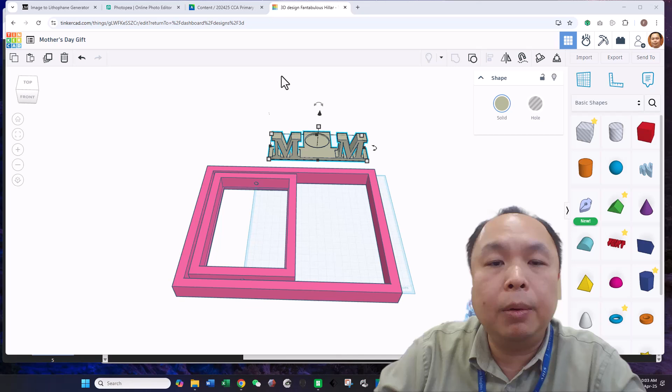Okay, this is one of the easier designs. You just create two M's and then we use lithophane. Later we will use another software. We may use up to three software to create this for this lesson. Okay, if you want to create this, let's look at my design here.

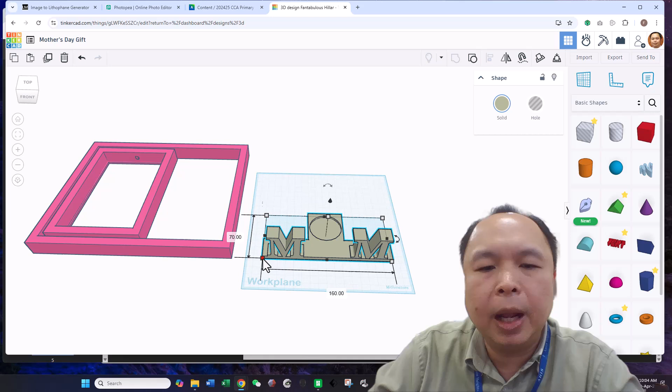You can see the size is 160. This is the width. Then this is the length, 70 times 160. The height you can choose about 38 to 40. That is fine. And then you need to create the love shape using the lithophane software.

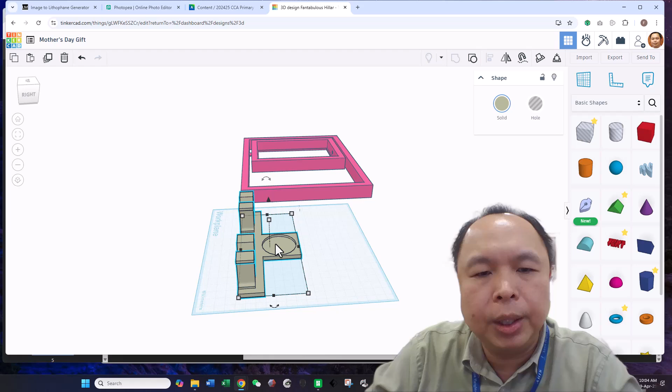What is this behind? Behind is actually a place to put the candlelight. We will use electronic candlelight, so it will be safe. We don't use real candlelight; it may cause fire if we are not careful. Okay, so this is the foundation you create, and then to create this one, you use a software called Lithophane Maker. Go to this website and you can create this.

So you need to bring along a photo. What you can do is upload your photo in your submission, so on the next lesson you can download it back. That is how you can upload from your house and keep the photo in Blackboard. After that, you download it back when you are in school during your 3D modeling club session.

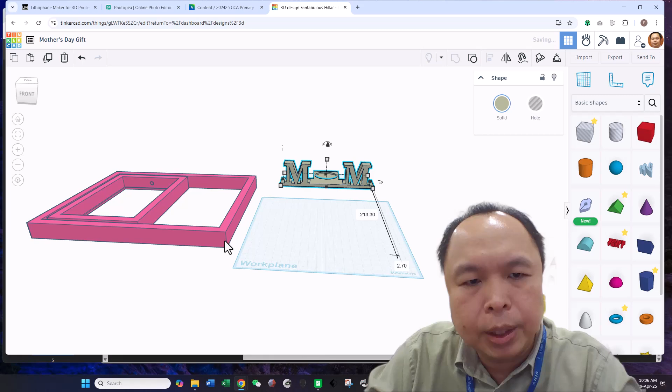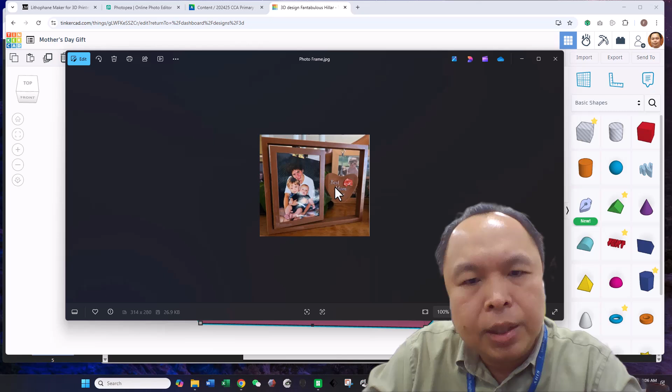The second one we will do, I prefer this one, frankly speaking. This is a lot nicer. If you look at this other design, this is the design I want you to do. Very nice. We can print in different colors; we don't have to print in this color. You can create a message for your mom, and then we can hook it to the frame. You just need to make sure you have a hole at this area.

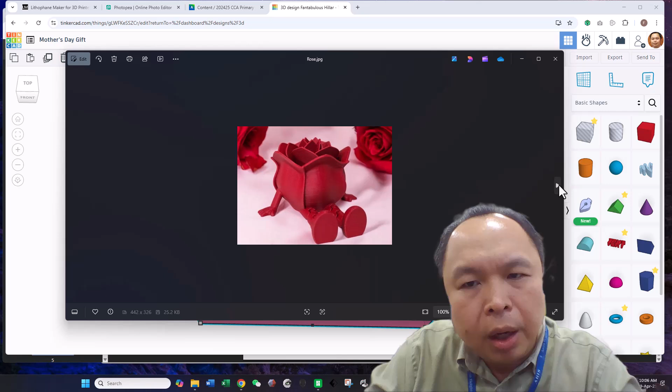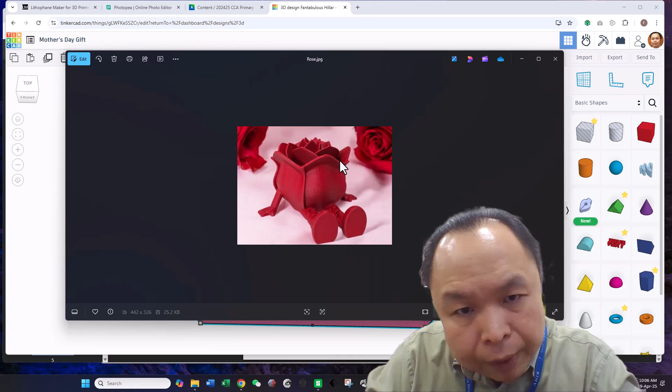Okay, this is another one for those who can complete all your work. If you can finish by lesson one or the beginning of lesson two, then you can create this. It's very simple. You're going to find a flower. After that, you add the hand and the leg that we have done before. You can look at your term two work. You should be able to find the time we created something for Christmas. So you can use that file to add in the leg and the hand.

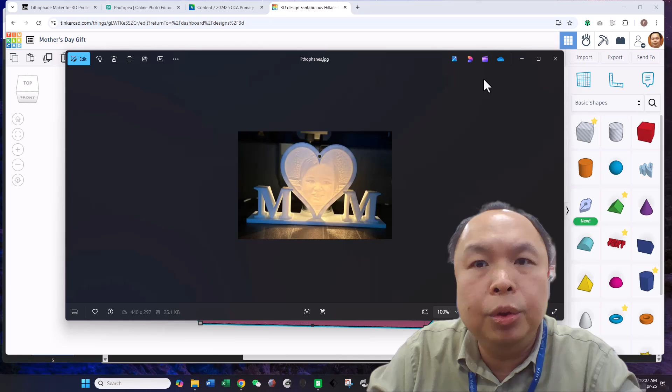Okay, this is a simpler design, very simple design. I don't recommend doing that. This is provided you fail to create both; then you try to create this. But I will say you just follow step by step. You should be able to complete all this work within the two lessons. Okay, let's come back to here.

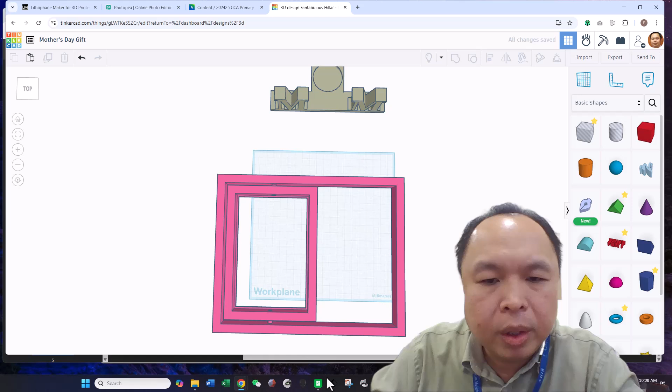Okay, this is how you create a frame. The height of the frame is 20 mm. Let me just bring this in. You can see its height is actually 20 mm. You just put it in here. Then each of the rest, you can see this is 1 cm, 1 cm, 1 cm, 1 cm, 1 cm. It's very easy. So what is this size?

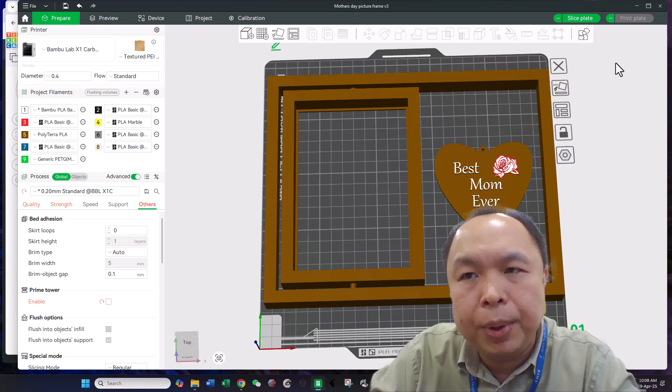Okay, look at the size. Here is 200. Here is 250. That's the maximum we can put in our printer. You can see 200, 250. This is the maximum size for our printer. Then for the photo frame, this one can turn.

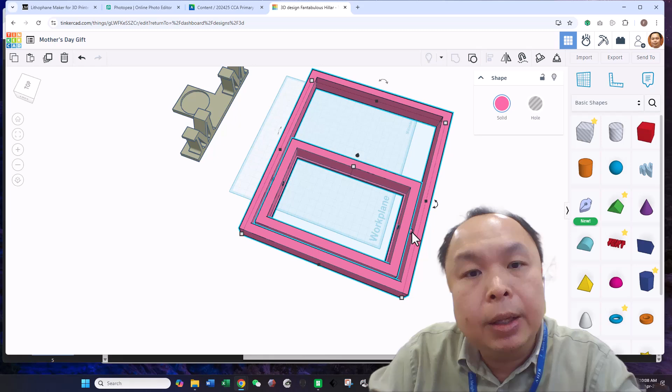You should know that you can add a stick inside, in between, but you just need to make sure the hole at the frame, outer frame, is bigger than the size of your stick. Then it will be able to spin. Okay, what is the size? Very simple. I already gave you the outer size, okay, outer one.

Now the inner one, I can give you the frame of this so-called photo, or you can create a little frame with this size, okay. If you cannot create a little frame, worst case scenario, I would say there's no problem to create a little frame lah. But if you are really unable to create, forget to bring pictures, all this, then we have no choice. We'll finish the frame, then just create a simple white color plastic so that you can add a photo.

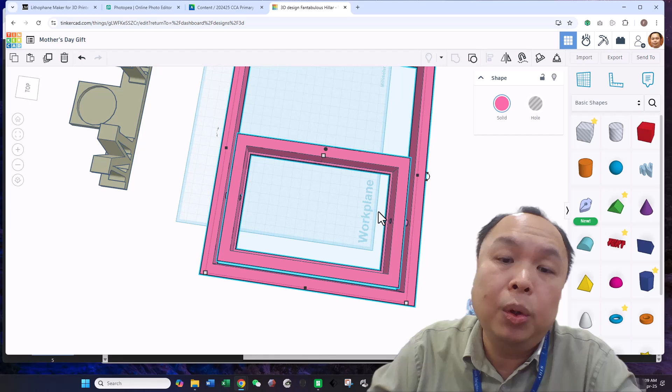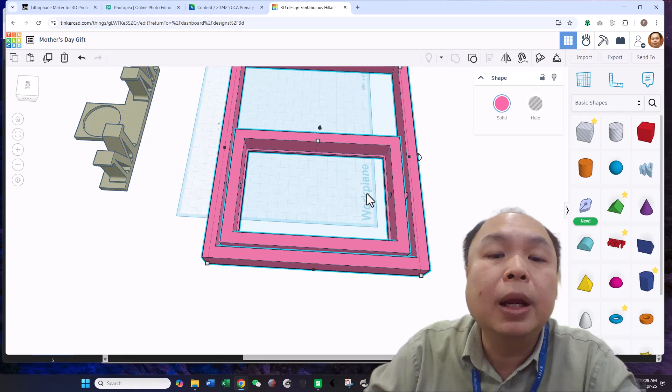Okay, then for this, I would say if you can create a little frame, then you have to think, okay, how to put your candlelight. If you put the candlelight at the bottom, something like this, you add another barrier for the candlelight, then you will see the candlelight will only shine at the bottom. If you want to increase the height, you want to add the candlelight somewhere in here, then you will fail to light up at the bottom. So you cannot use this design.

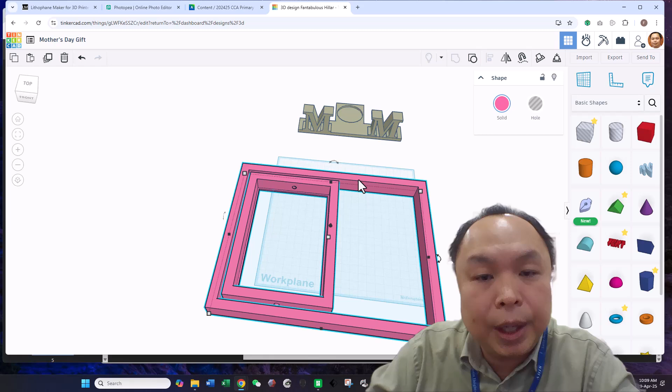You have to think of a way how to support it so that the candlelight can shine, can have light until the bottom. Okay, this one you have to think. I can give you ideas, but before that, I want you to think about a solution. So, what is the size of the little frame inside? Here to here is 150. Here to here is 100.

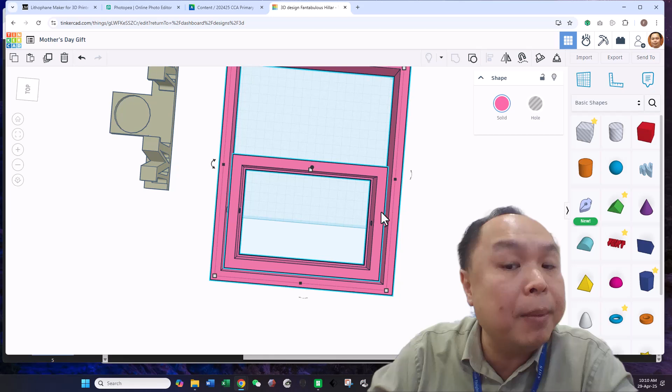So here to here is 150, not including this outer area, this extra area. That means you add one more cm here, so it's 150 plus this, 160, and plus another 1 cm, that is 10 mm, becomes 170. So the frame is 170. So now you know the outer. Okay, the side of the outer here to here is 200. Here to here is 250. You should know that the inner frame is 170.

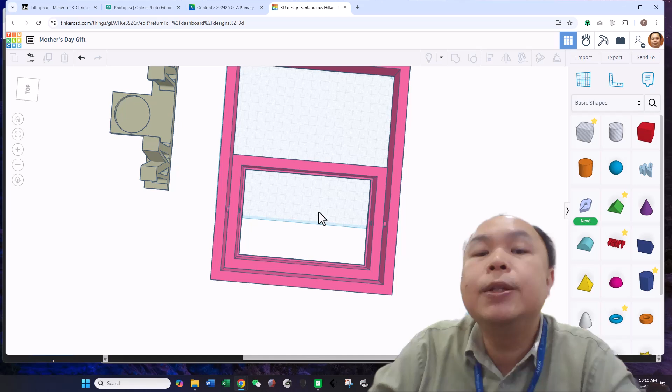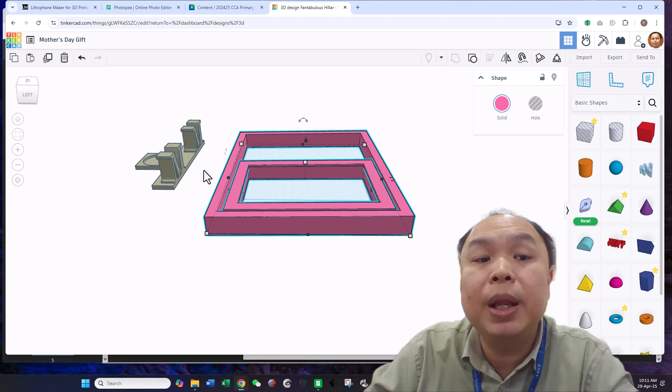Once you create all these, then you can join them together. You can put them into one piece. If you add the candlelight at the back, okay, I will print it upside down. I will print it something like this. Okay, so that the candlelight holder, you can build something to hold the candlelight. Okay, so that is what I want you to create. Let's see, is there anything else?

Okay, this is the one website I'll put in our instructions in the Blackboard today. Photopea is the one that, just in case, if you really didn't bring the photo in the next lesson, then probably we have to add some message inside. Then you use this to create a little thing. Okay, that is a worst case scenario, but I hope that you can remember to bring your photo so that you can create a nice little thing to put inside this Mother's Day gift design.

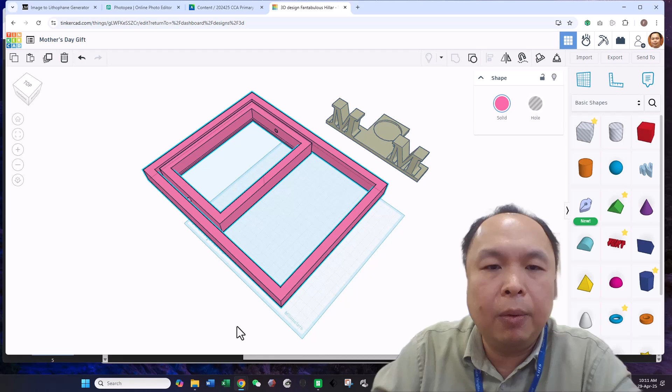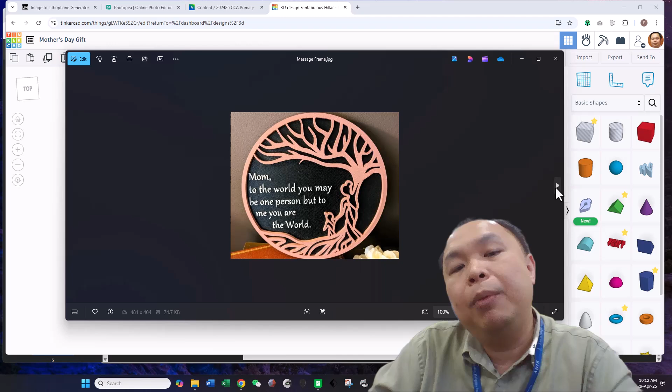Okay, so this is what you need to do. You can choose to do this type, or you want to choose a simpler one. Highly not recommended to do anything simpler than that. Like this one is too simple. We can do something like that, but we have to increase the complexity of this design. Okay, so far your work is this one.

Create the frame in lesson one, then lesson two try to bring the photo, finish off the little frame. Then if you can manage to think of how you create this one, I think this one is in your term one, so you should be very good in creating something like this. Dig a hole to hang it, and then on the top of here you can make a hole, okay, in the direct center, so that we can put the string up, and then later we use something like a paper clip to hold it in the center.